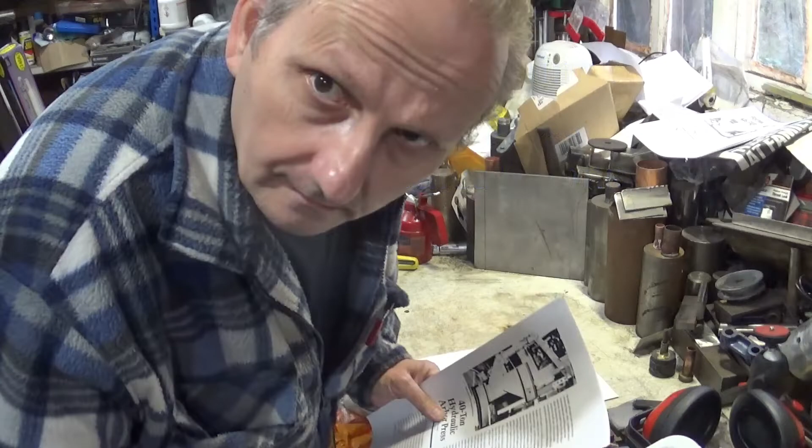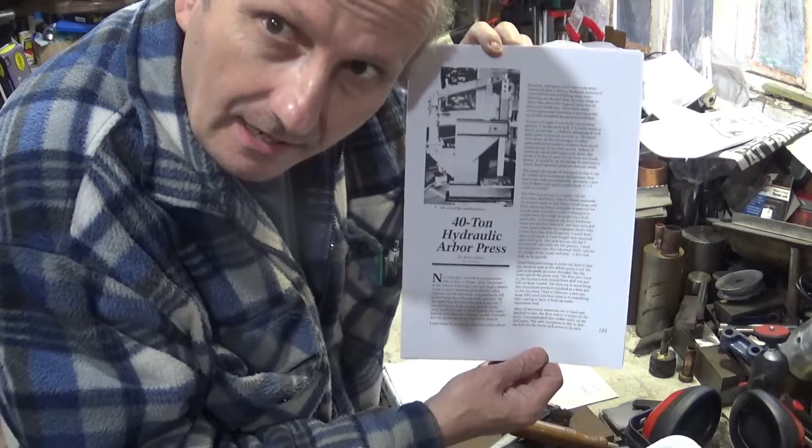Right, talking about this again. This is the Home Shop Machinist 40-ton Arbor press design. Back talking about the clevis pins, for a couple of different reasons.

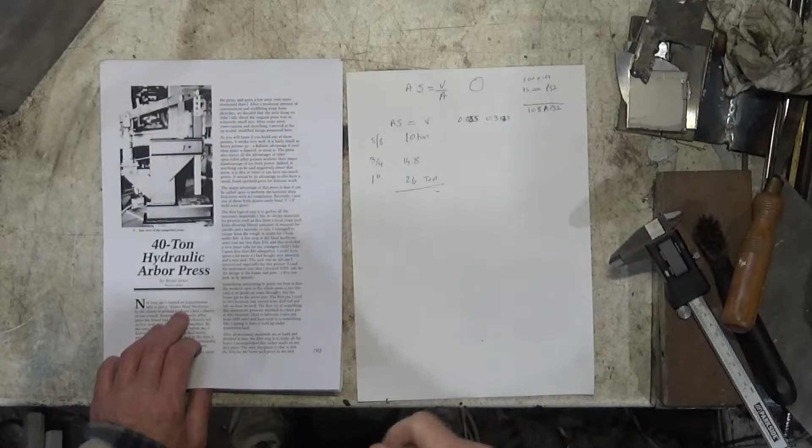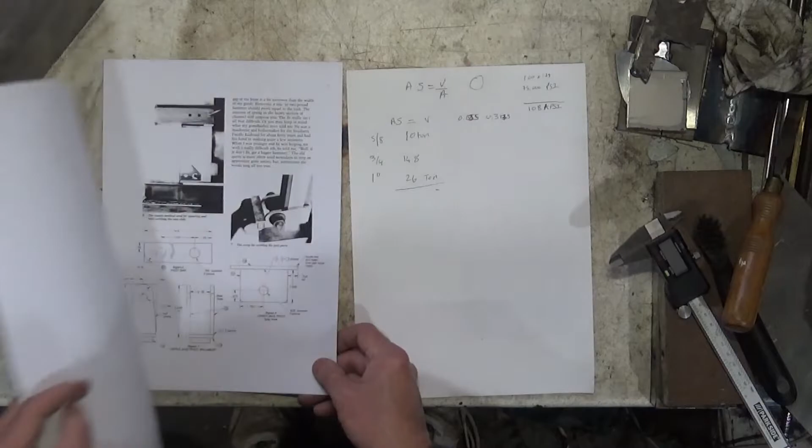Top chap. What he pointed out was, let me see if I can see a better drawing of it, but you can also in the Fireball tool see that there's two plates either side of the bar. You can see there, that's the example. And what that leads to basically is that the shear is split across two points, not one.

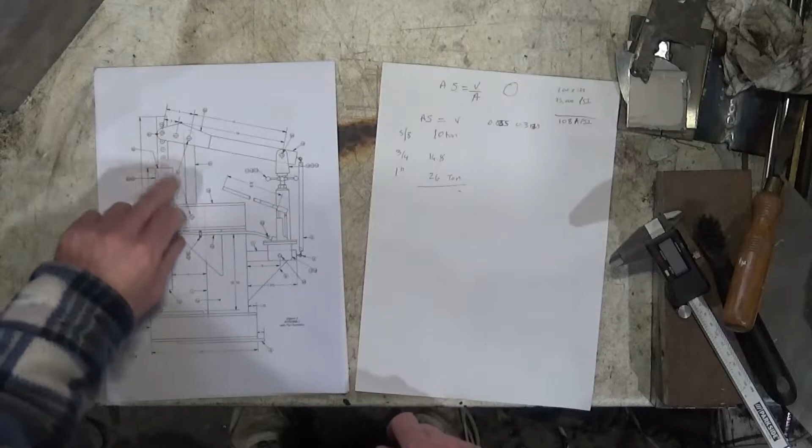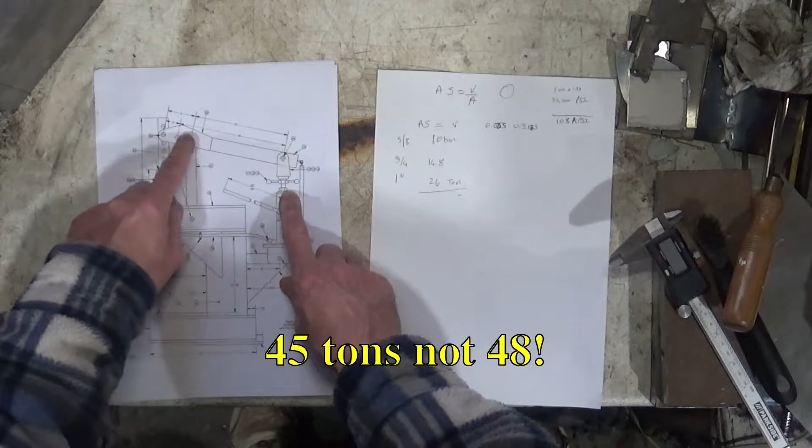So therefore, whatever the shear of the pin is, you can get away with double that. That's useful. Then the other thing is, discussing in my model engineering club, we were discussing what the force here is. A club member, Ian, said, and I very much think he's right, that if you've got, say, 5 tons pushing up there and 40 tons pushing up there, you must have 45 tons trying to hold this down here. So that gives us this strain here is going to be the addition of that strain and that strain.

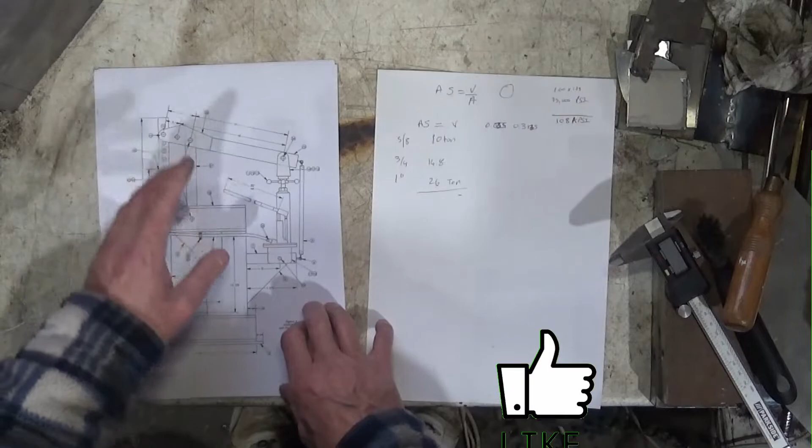So with that said, that is double there we can get away with, not the numbers I was working on last time. I've had a look, and 12.9 bolts provide a good level of shear stress at 108,000 pounds per square inch, as opposed to 75,000, which I was going to work on.

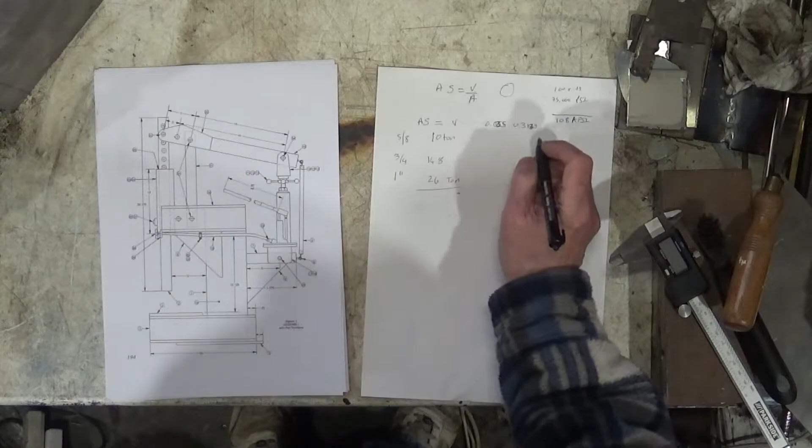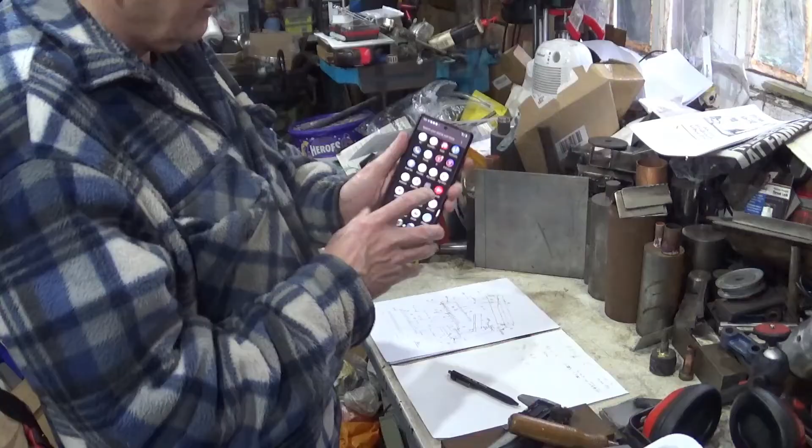And I was looking to source some 12.9 grade bolts, which is 108,000. So what I've done is I've got some pricing on those, and I'll have a think about those. But I'm just going to get my calculator out. My calculator is Real Calc on my phone.

So I've got pricing for 20 and 22 millimetre. 24 millimetre is twice the price of 22, so I'm not going to go for that. But if I went for a 20 millimetre bolt, so if we did 10 millimetres, we'll convert that to proper measurements.

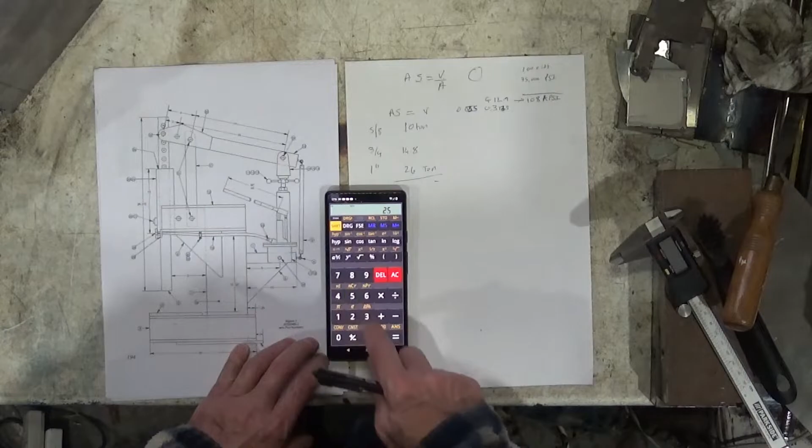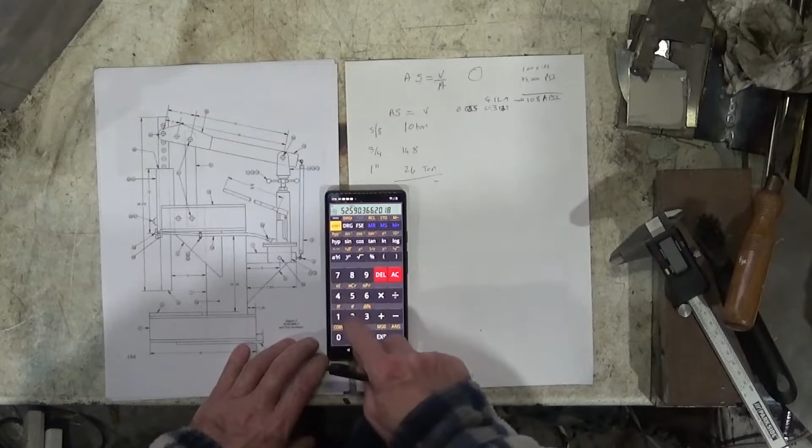And then we can square that, times it by pi, and then times that by 108,000. We get a breaking strain of 52,600 pounds. Divide that by the number of pounds in a ton. We get, for a 20 millimetre bolt, 23.47 tons. Okay, and if we double that, at 40, just under 47 tons.

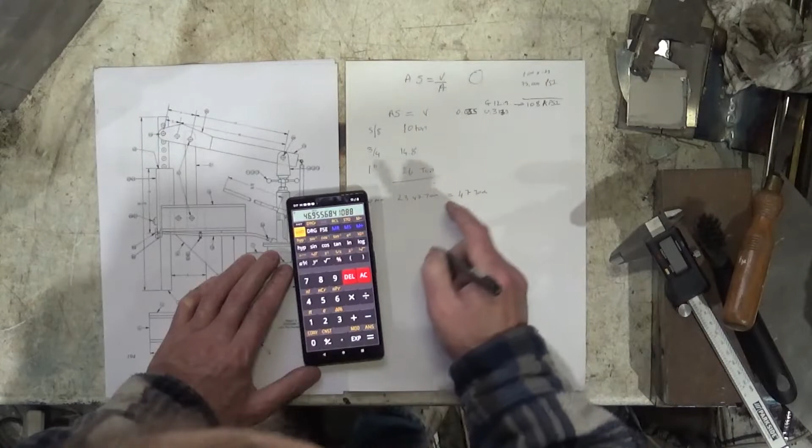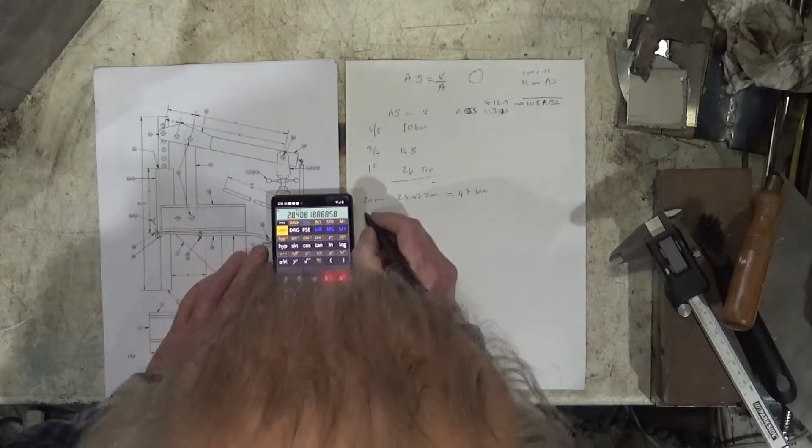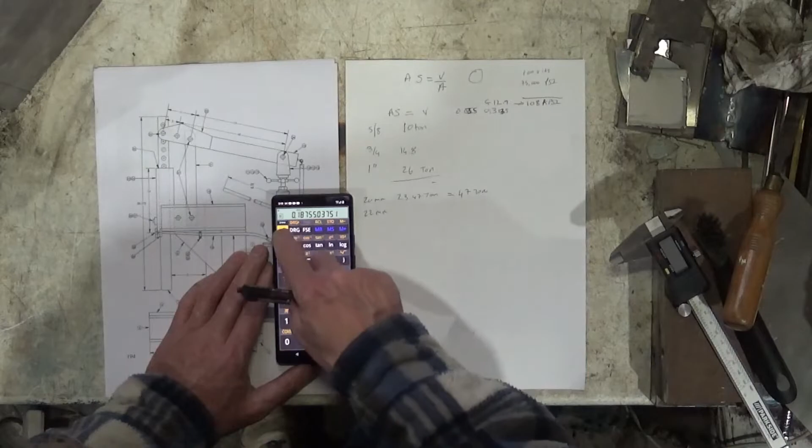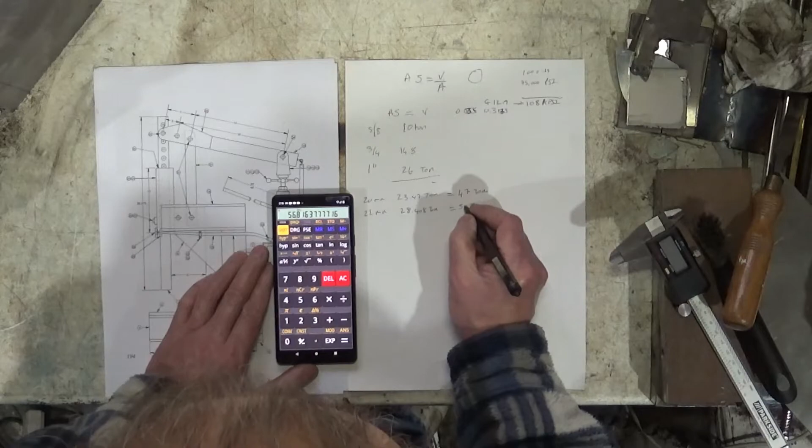And that gives us... now, we're not getting the safety factor at 40 tons I would like with that. That will do us okay, that will do us more than okay for a 24 ton press. I think that would just about do for a 40 ton press.

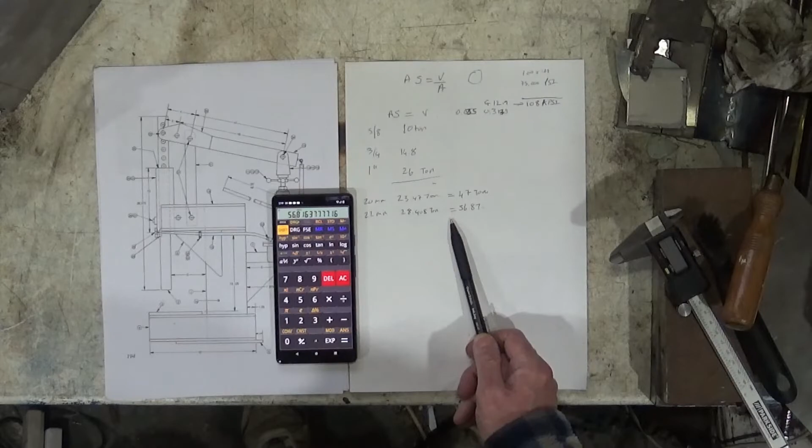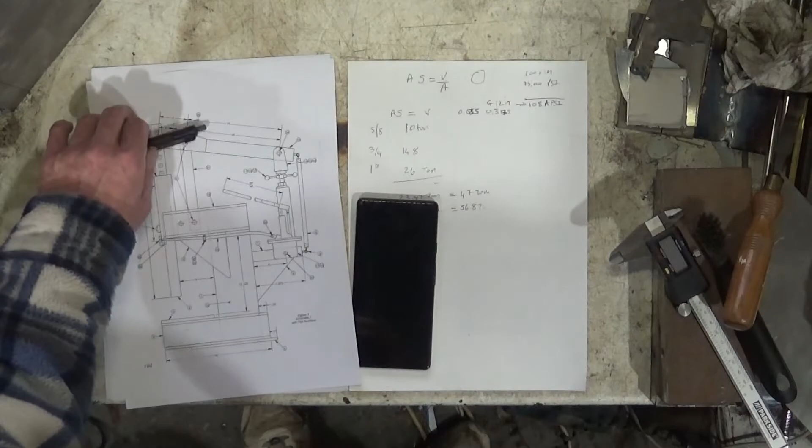But what the Fireball Tool one does is those two are the same size, and that means that you can take that off, turn it round, have that hanging off this way instead, and that makes it a hand operated arbor press. That's a very useful additional functionality, because if you're doing something that doesn't require tons and tons of pressure, you can still get a couple of tons force on that. You can just go crank it through. So that's what I think I'm going to do.

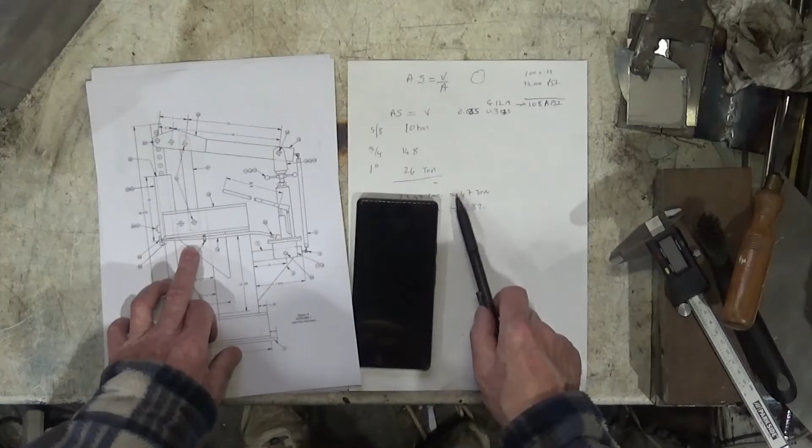I just have to decide whether I'm going to go for the 20 or the 22mm bolt. You can see the breaking strain between the two, the difference is massive, just for a relatively small increase in diameter. 2mm, massive difference.